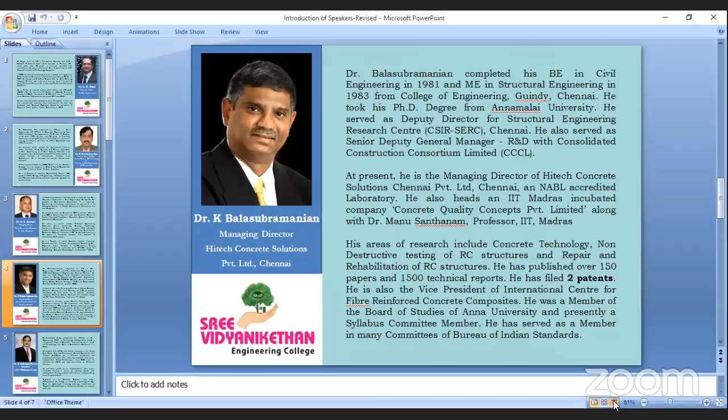Good morning to Balasubramanian, sir. It's my privilege to introduce Dr. Balasubramanian, a renowned civil engineer.

He completed his BE in Civil Engineering in 1981 and ME in Structural Engineering in 1983 from College of Engineering, Guindy, Chennai. He took his PhD degree from Annamalai University. He served as Deputy Director for Structural Engineering Research Center, CSIR SERC, Chennai.

He also served as Senior Deputy General Manager R&D with Consolidated Construction Consortium Limited, famously known as CCCL. At present, he is the Managing Director of Hitech Concrete Solutions Chennai Private Limited, an NABL accredited laboratory.

He also heads an IIT Madras incubated company, Concrete Quality Concepts Private Limited, along with Dr. Manu Santhanam, Professor of IIT Madras. His areas of research include concrete technology, non-destructive testing of RC structures, and repair and rehabilitation of RC structures.

He is a renowned structural engineer who renders service to the civil engineering fraternity in the form of training and mentoring.

Good morning. I would like to thank Professor Ishwar Reddy and Dr. Yuvraj for giving me this opportunity to speak to you. Today, I'm going to speak on the very practical aspects of concrete NDT practices and case studies. My approach would be basically to tell the faculty to approach any problem from a consultant's perspective. You're all very strong in teaching, and for the past 10 years I've been more in the industry.

So my talk will be more oriented towards solving industry issues from a practical consultant's perspective. This is what I wanted to tell as an introduction, and I would straight away go into the topic. I've been doing NDT for the past almost 35 years, so I would like to tell all the positives and the limitations also in the various NDT methods.

So what are the various non-destructive tests that are commonly adopted? I might have missed one or two, but these are the common non-destructive tests used in the construction industry: rebound hammer test, ultrasonic pulse velocity test, core drilling test to evaluate equivalent cube compressive strength of concrete, carbonation test, half-cell potential test, and even resistivity test. Also the evaluation of chlorides and pH through concrete powder samples, and profoscope survey for identifying cover and rebars.

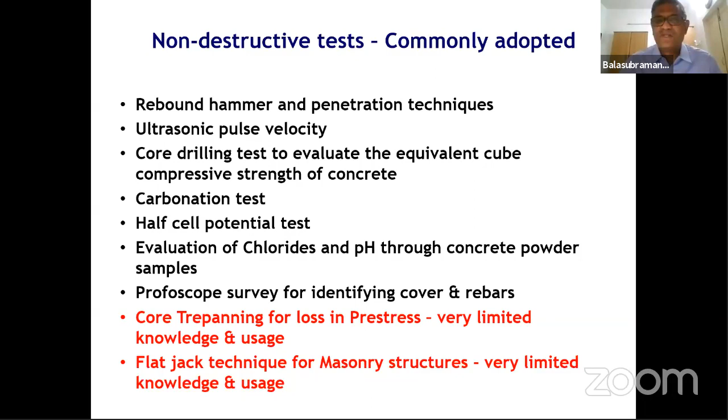So these are the various non-destructive methods. The non-destructive methods that are not very popular are the thermal method, radiography method, and stress wave propagation method.

These methods are not popular because of the lack of physics knowledge on the part of structural engineers, and our reluctance to work as a team with consultants with a strong physics base. For example, you have impact echo and many other things. There are people carrying it to construction sites, but the interpretation is a little difficult. Unless you have a very strong physics knowledge, or at least someone on the team who does, it's very difficult to interpret these methods. That's why they haven't become very popular.

But I feel shortly people will be working more and more on these methods in the laboratory, and then taking them to the field. Once some correlation can be obtained, these methods will become more popular.

Right now, as of now, we are using some very rudimentary methods like the rebound hammer, UPV test, and so on. So first I'll tell you what the rebound hammer test is. My structure for the talk is: first I'll quickly go through all the various test methods and their limitations, then I'll go into situations where these tests are being used, and finally I'll wind it up with a case study.

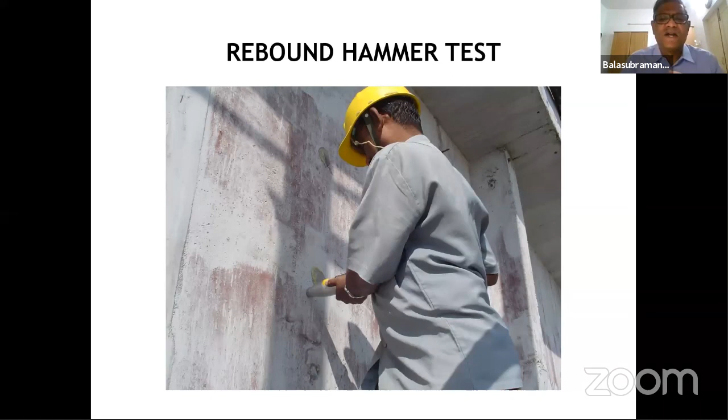So, the rebound hammer test—most of you are aware of it. It's basically handheld equipment that measures the surface hardness of the concrete. The rebound is measured on a graduated scale, giving a rebound number; the larger the number, the harder the surface. It's basically a qualitative test.

Unfortunately, what is happening in our country is that this rebound hammer test is being grossly misused. The reason is that rebound hammer numbers cannot predict compressive strength very accurately. They use calibration graphs supplied by the manufacturer, or some laboratories make cubes, hit them with the hammer, and try to make a correlation graph. But from my experience, it is very, very dangerous to use a rebound hammer to predict the compressive strength of concrete, because it is always giving 1.5 to 2 times more than the actual strength.

So it's basically a qualitative test, because it measures near-surface characteristics of the concrete, meaning it measures the quality of the cover concrete. The cover concrete is very important because it is through the cover concrete that chlorides or carbon dioxide diffuse into the concrete and depassivate the steel. So naturally the cover concrete is important, and this rebound number may give you some idea about its quality. But to predict the strength of the concrete based on the rebound number is a little risky.

It also depends on the smoothness of the surface, varies with the size, shape, and rigidity of the specimen, and is affected by the degree of saturation. Generally, carbonated concrete gives a very high number. So these are some of the limitations of the rebound test.

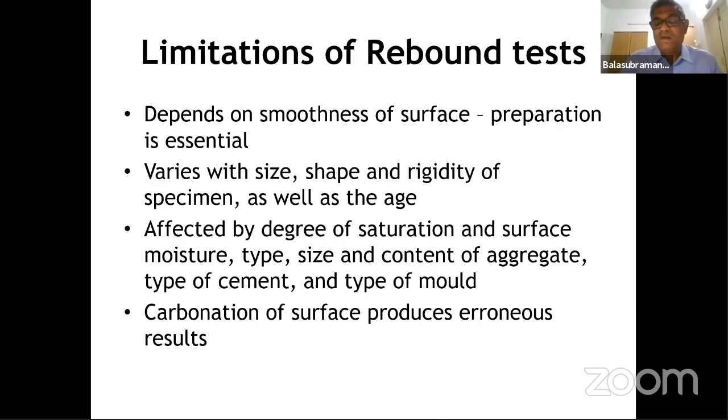As faculty, you can definitely teach this method, but you must always put a rider that predicting the compressive strength of concrete through the rebound hammer may lead to erroneous results, in correlating with strength.

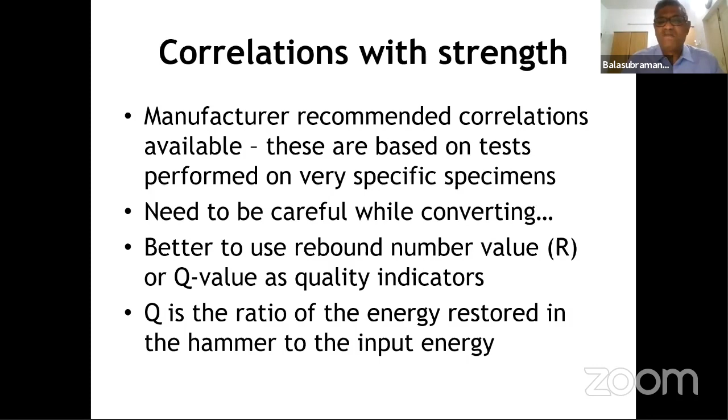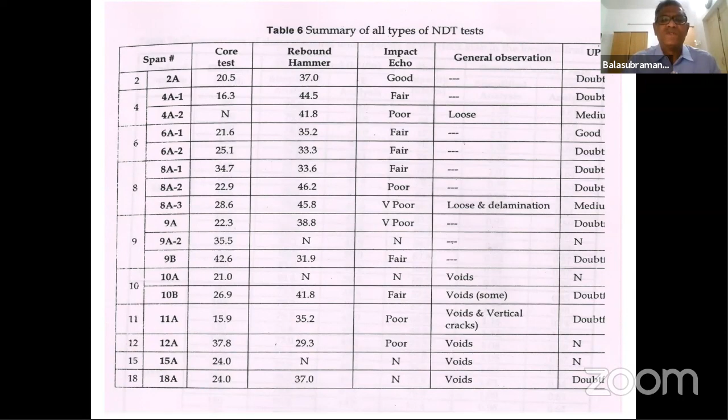So what is happening in our industry is, for example, they make the columns. Within 21 days, the next slab is made. After 28 days, the cube compressive strength results come. Sometimes the results are lower. Then the contractor is a little afraid to take the core, because he knows when the cubes have failed, most of the time the core also will fail. But the slab has already come up. So the NCs are created, by the PMCs and by the client engineers, and the NC has to be closed.

If he takes a core and the core results come low, it may lead to some strengthening, like micro concrete jacketing or FRP wrapping, based on the designer's decision. So that time he lands into trouble, because the floor space is reduced if you go for micro concrete jacketing. So he brings in an agency with the rebound hammer, and they hit it and finally say that the strengths are fine. So the NCs are closed. This is what happens where I come from, in Chennai, where this rebound hammer test is basically being used for those things.

Another issue with the rebound hammer is when we have plastic shrinkage cracks on the deck slab. The PMCs or client engineers are unhappy with the contractor, and the contractor does not want to own the responsibility because he has not floated the concrete and closed the plastic shrinkage cracks. So he puts the blame on the RMC guy. The RMC guy does not know what to do, since he has to get business from the contractor. So he knows the contractor has made a mistake, but...

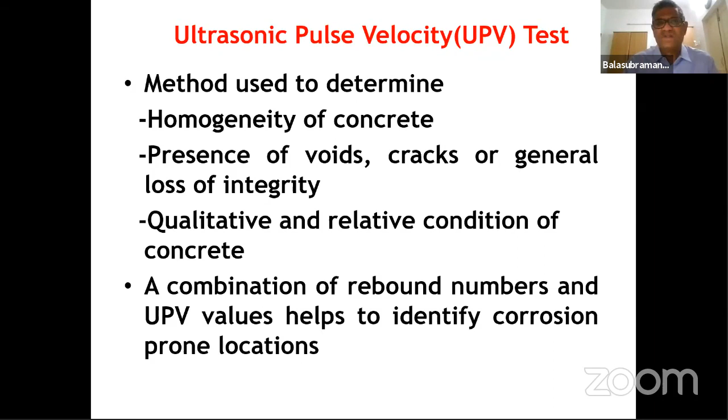So what are the various methods of doing a UPV test? Direct transmission test is always better, it gives a better confidence level. Suppose two sides are not accessible, then you can do a semi-direct transmission method where the path length is the hypotenuse of the triangle formed between the two points. And sometimes indirect or surface transmission method is adopted too.

For example, you have a retaining wall where backfilling has already been carried out, and the client is not happy with the quality of the concrete in the retaining wall. Obviously we cannot dig up the entire backfill, so that's when indirect transmission method is adopted. But it's a very approximate method, so you should try to avoid it as much as possible.

And sometimes these UPV tests are even used to measure the depth of a crack, and for that you go for an indirect measurement. When measuring crack depth through an ultrasonic pulse velocity test, sometimes it gives an erroneous result, so you need to be very careful.

Because sometimes I find the width of the beam is about 30 centimeters, and when you apply the equation given in Bungey or in the IS code, you sometimes get a very erroneous result. So you have to be very careful while predicting the crack depth also.

This is common knowledge: if sound concrete is there, the waves will travel very fast. If there is reinforcing steel, it travels much faster. But we don't apply a correction factor for the reinforcing steel, because as we'll see in the next 2 or 3 slides, the method to predict the numbers given for the integrity of concrete is so wide that the reinforcing steel may not have such a great impact.

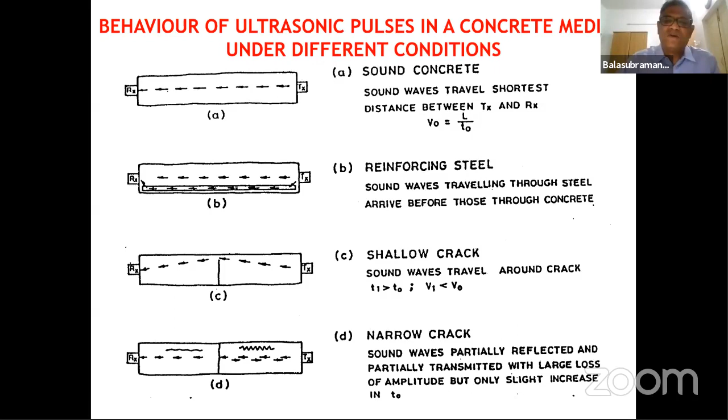When there are cracks, the sound waves have to travel around them, so the time taken is more. A narrow crack will sometimes be partially reflected, while a wide crack will definitely be reflected, giving you unstable readings or no signal at all. With voids and micro cracks, sometimes you may get a very low value or an unstable reading.

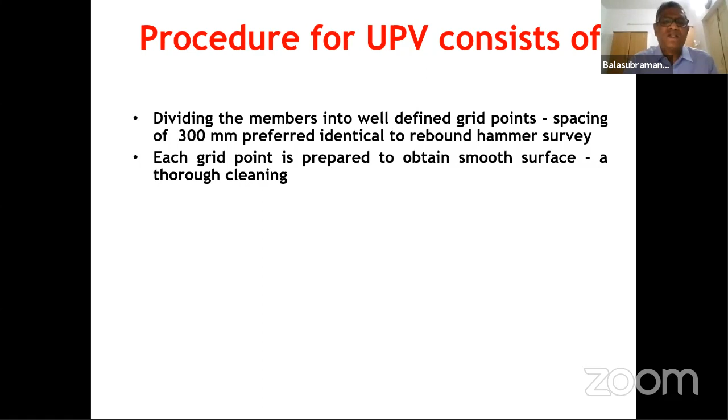The general procedure is to divide the member into well-defined grid points. There is always a debate on what the spacing should be - 300 mm is what the code gives, but as a consultant you can take a call, because if you put 300 mm for a large structure, the number of points increases and the cost of the whole testing goes up. So each grid point spacing, 300 mm or 500 mm, is something the consultant can decide, though the guideline prefers 300 mm.

Each grid point has to be prepared and smoothed. We need to apply acoustic coupling, like grease, between the transmitter and receiver so the pulse is properly transmitted. Recording the transit time is done in an instrument - generally people use PUNDIT. Then the velocity is calculated as L/T, that is, distance between the two transducers divided by the time taken.

So if the velocity is more, the quality is more. That is, if the time is less, the velocity is higher, so the integrity is much better.

Now, the IS code - recently, in the past year, it has been upgraded. The old IS 13311 said any velocity above 4.5 kilometers per second is excellent.

Between 3.5 and 4.5, they said it is good, and 3 to 3.5 medium, and below 3 doubtful. This was very useful to consultants like us because we had a clear idea that generally when velocities are low, meaning the integrity is not that good, the general methodology given is grouting with either a low viscous epoxy resin or cement. When velocities are above 3.5, there is no problem. When velocities are between 3 and 3.5, we found that the grout does not go inside. Only when velocities are less than 3 kilometers per second does the grout generally go in. So it was quite okay.

Now the recent IS 516 part 5 has come out with this kind of specification. They say that for any grade of concrete less than M25, any velocity below 3.5 is doubtful, 3.5 to 4.5 is good, above 4.5 is excellent. And for all grades of concrete above M25, it says below 3.75 is doubtful.

So this is something which I spoke to my colleague, Dr. Manu Santhanam, who's a very eminent concrete technologist, also in the Bureau of Indian Standards. We told them that most of the structures we go and investigate are more than 30, 40, 50 years old. The basic idea of this table is the code committee, subcommittee felt that the quality of concrete has to improve because we have gone many notches in the way we do concreting. So naturally the service life of the structure has to be good, and for that the quality of the concrete has to be good. So they have put higher threshold numbers of 3.75 and above.

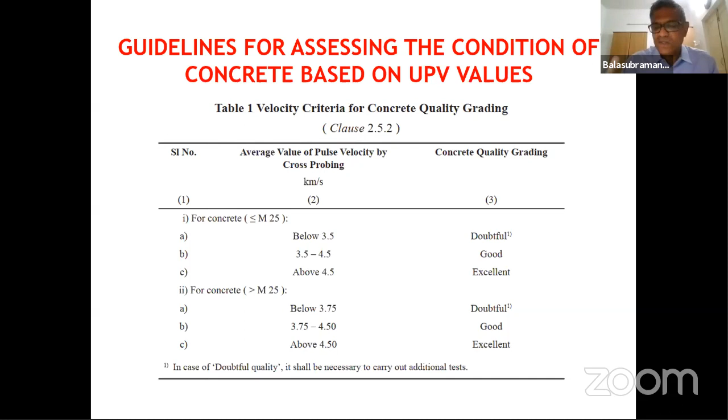Anyway, this is something which I don't know which code has to take a call on. They have to go a little more into this and come out with something, because I'm very sure, any velocity now as per this code below 3.75 is doubtful. For example, if the velocity is 3.5, I'm going to say the quality of the concrete is doubtful. Now the client is going to ask me, sir, you have given the quality as doubtful, then what is the methodology? Then I'm going to say grout. So now they are going to call for grouting. I'm very sure if the velocity is 3.5, no grout is going to go inside. So for the past 6 months we are all struggling how to circumvent this problem. As a consultant, you have to give grouting because as per code it is doubtful, you have to give it. But practically we know nothing is going to go inside. So this is something we are not able to understand.

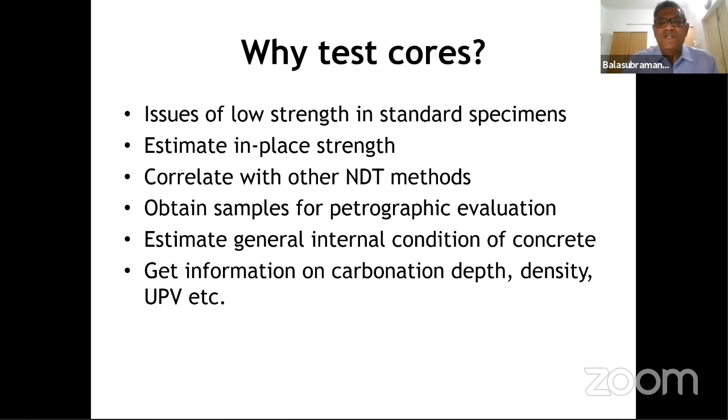Now next is the core test. Why do we test cores? It is basically because of low strength in standard specimens, that is, in the cubes. Sometimes designers may like to do a design check, and the building may be 40 years old where no drawings are available. At that time we do the core test to give the designer the FCK value, or sometimes correlate with other NDT methods. Sometimes people ask for petrographic evaluation to generally estimate the internal condition of the concrete or get information on the carbonation depth, which I'll cover in the next few slides.

And how many cores to be tested? Again, no code of practice is very clear about it, whether it is ASTM, ACI, BS standards, or Euro standards. Nobody says how many cores we need to take when the quality of concrete is suspect. So this is something you need to take a call on as a consultant.

If there is a cube failure, then take at least 3 cores from that particular batch. And if it is meant for in-place strength, as I told you, the designer wants to check a multi-storied building, which is 10 stories, which does not have any GA drawing, no structural drawing, no FCK value. Then that time we try to take as many cores as possible from each floor, about 5-6 cores, 2 from the column, 2 from the beam or something, and then try to give the designer some kind of confidence level for him to feed it into his STAAD Pro model or any model.

So how many cores is a question mark. I don't think people have to break their head so much into this. As a consultant, you take a call and take a conservative call, that's all. You can decide on the number of cores. And this is how a core test is done. Most of you would have seen that.

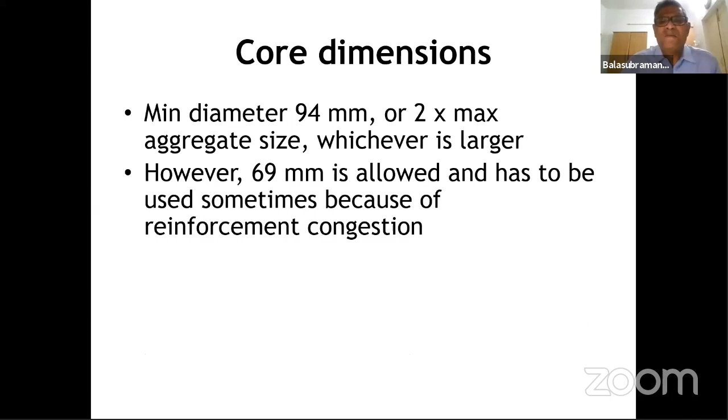So what is the core dimension? Generally it says minimum diameter 100 mm or 94 mm. But today the congestion of the reinforcement is so much that we are not able to take a core. Suppose the core is 100 mm diameter, then the inner diameter is approximately 94 mm. Sometimes the congestion of the reinforcement is so heavy.

Most of the time what we are doing, every year we are taking a few hundred cores, and then generally we are going for a 69 mm diameter core, because cutting of the reinforcement has to be avoided to the extent possible.

And generally L/D equal to 2 is preferred. Now the new code has given you correction factors for L/D which are not exactly 2. And any L/D equal to less than 1, we should not test the core, because it will not give a proper result. Testing of the cores is as per IS 516. L/D should be 2, try to make it as much as possible to 2.

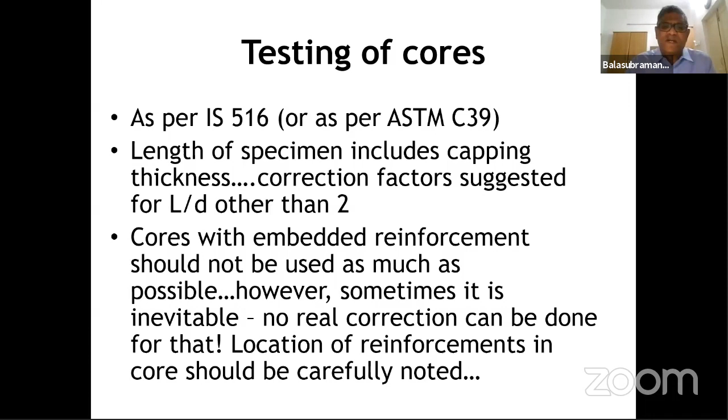And cores with embedded reinforcement should be avoided as much as possible. One is cutting of the core, cutting of the reinforcement during a core test - designers will not be happy about it. Second, a core with embedded reinforcement may give you a very erroneous result. If the bond is not good and all that, then it may not give a proper result. So as much as possible, try to avoid cutting of the reinforcement from all perspectives, from the designer's perspective, as well as from the core concrete strength perspective.

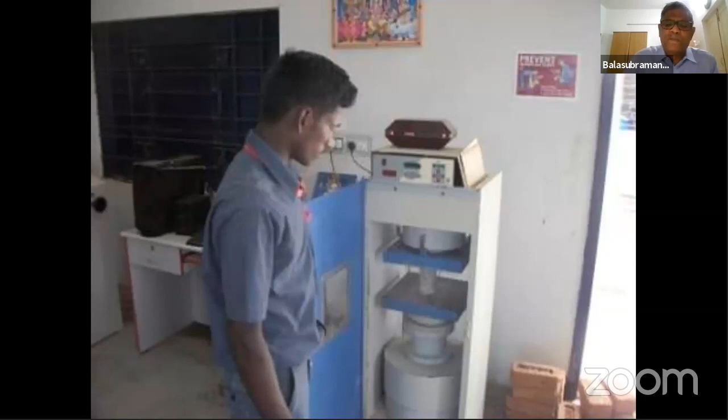Actually, sulfur capping - now we are done away with sulfur capping because it is not good for health. And now we are doing it with a high strength compound. And now cores are tested, and then finally it's done.

Then what is the acceptance criteria? Now the IS code says, suppose you are testing 6 cores or whatever number of cores, the average should not be less than 85% of the FCK, not the target strength, FCK. And no individual core shall be less than 75% of the FCK. For example, if you take an M30 grade concrete and you have taken 3 cores or 6 cores, average should be 0.85 times 30, which is approximately 25.5. And no individual core shall be less than 0.75 into 30, which is 22.5.

This is what the IS code says. Suppose it doesn't satisfy M30 grade, then you need to check whether it is satisfying M25 grade and then pass on the information to the designer. So the designer takes the final call.

And then from the cylinder to cube, we apply a correction factor of 1.25. So basically, for diameter lesser than 100 mm, if the diameter is 75 plus or minus 5 mm, then we apply a correction factor of 1.03. And if the diameter is less than 70 mm, we apply a correction factor of 1.06.

So what are the various correction factors? One is for the L/D ratio. Generally try to take a core with an L/D ratio of 2. If it is not possible due to practical scenario, then there is a correction factor that is given. Generally try to take a better 100 mm diameter core, but then due to congestion of the reinforcement, we need to cut the reinforcement, so we go for a lesser diameter core.

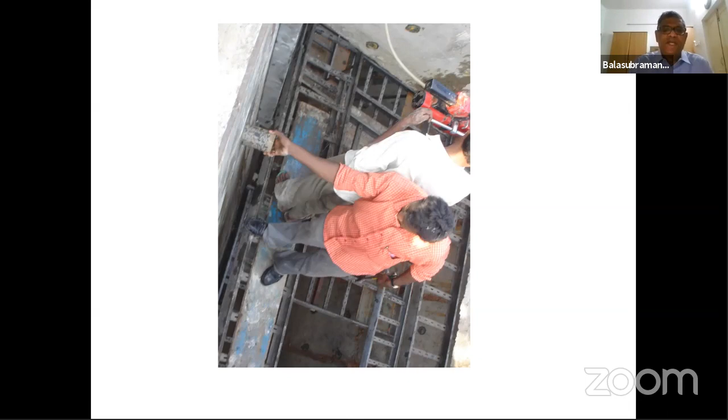Generally, this is a durability test — the carbonation test. I think yesterday they would have spoken a lot about durability. Carbon dioxide diffuses into the concrete through the cover concrete and reacts with the calcium hydroxide, reducing the pH value and depassivating the steel. That's carbonation, and one way of checking it is getting the pH of the concrete through a concrete powder sample.

The second method is you take a core and spray a phenolphthalein solution on it. The whole thing should turn pink, but there are locations where it will remain colorless. So this is a plaster and this is concrete — the carbon dioxide has diffused so much into the concrete.

Basically, the reason we do this test is that during repair and rehabilitation, we always want to chip off the bad concrete. So if the carbonation depth is significant, say 25 or 30 mm, we chip off that carbonated concrete and give a fresh layer — putting in a micro concrete or a polymer modified mortar, depending on the thickness. So this is the carbonation test.

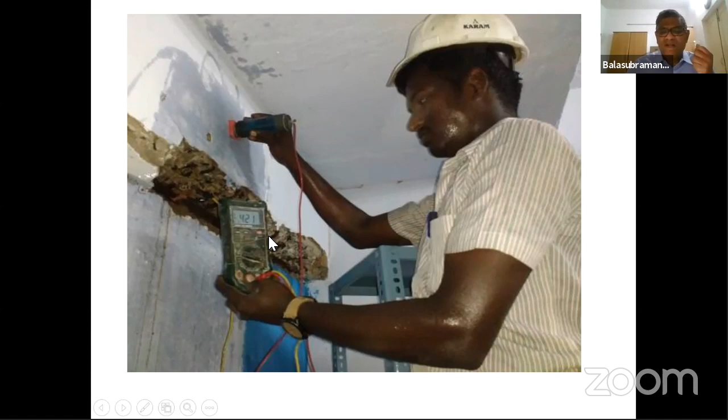Then there's the half cell potential test, which is an ASTM test — most of you would be aware of it. We use a copper sulfate electrode with a multimeter; one lead is connected to the rod, which is chipped open and connected here, and we measure the half cell potential difference. If it is more negative than minus 350 millivolts, there's a 90% probability of corrosion. If it is between minus 200 and minus 350, corrosion activity in the area is uncertain. If it is more positive than minus 200 millivolts, there's a 90% probability that no steel corrosion is happening.

For me, this test isn't very useful in most structures we go to, because it's terribly corroded already. There's no point doing a half cell potential test on corroded areas, because obviously it has already corroded — the concrete has cracked, spalled, and there's a loss in diameter.

So generally we use this test when we go to a very huge structure, whether it's a marine structure or a bridge, where we're asked to give the rehabilitation methodology as well as a bill of quantity. When calculating the bill of quantity, we need to be very sure with the limited testing we do — so we do the half cell potential test on the good-looking locations, to check whether the visually good locations are really good through this test. That's the only case where we want to use it, because in any corroded area there's no point, since we'll obviously get a value more negative than minus 350, maybe minus 500 or minus 600. So generally we use this half cell potential test in a large structure only in the good areas, so that we know the visually good locations are really good from a corrosion potential point of view. That helps us decide on the bill of quantity required for the rehabilitation. This is the half cell potential test.

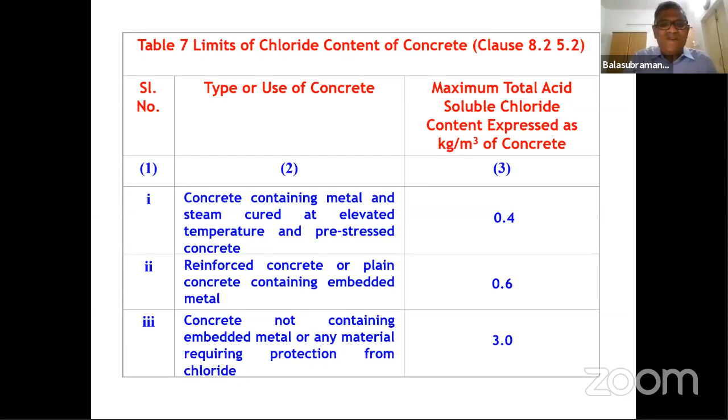That is more precise. Here, when I do it with a drilling machine, I cannot get a proper profile, because even if I put a dryer and try to blow it, it may not give a perfect result, but it gives some idea about the chloride content. The best way would be to drill a core, put it in a lathe with a chuck, and use a tool. Then you can precisely find the chloride content from 0 to 10 mm, 10 to 20 mm, and so on, so you know to what depth the chloride has penetrated, for suggesting a proper rehabilitation methodology. But that is very sophisticated, so we go for these simpler methods.

This is again common sense: high pH value and low chloride content means not corrosion prone. High pH value but high chloride content will naturally corrode because of chloride. Low pH value will corrode because of carbon dioxide, and low pH value with high chloride content is definitely corrosion prone. The last one is the profometer.

This is basically a profometer or profoscope. It gives you the location of the rebars and also measures their diameter. But there are a lot of limitations. A profometer will not detect a rebar if the cover is more than 70 mm. So that's a limitation.

Suppose I go and put it in a column. Generally, what happens is while kinking, or going from one floor to another, if the levels are not okay, they try to kink the rebar and take it up. So one side will have 15 mm cover, the other side will have about 80 mm cover. At that point, when the cover is 80 mm, this will not detect the rebar.

It can predict the diameter of the rebar, but there can be an error of plus or minus 25% in that prediction. Hilti also has much better equipment. This profoscope is about 5 lakhs, while that one is about 15 to 20 lakhs. There, they say it can be off by one diameter more or one diameter less. So prediction of the diameter of the rebar is a little dicey.

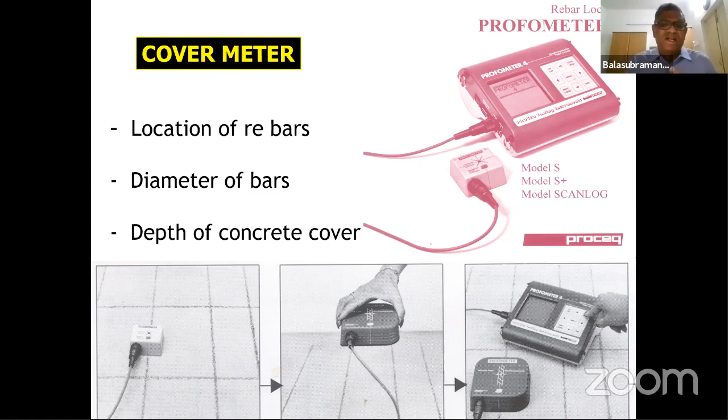So the final one is the load test, because when everything else fails, the IS code says do a load test.

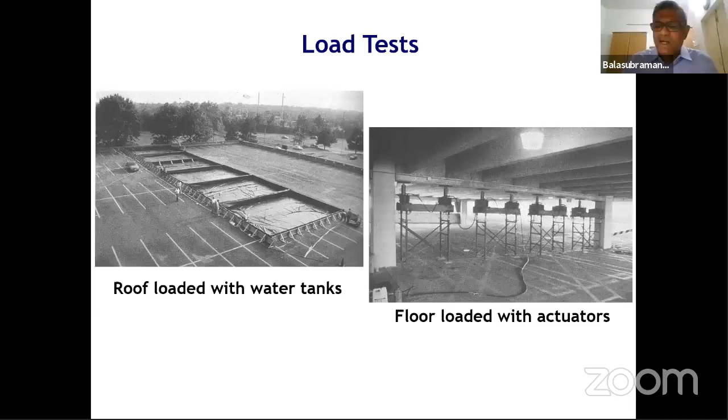You can do ponding, or you can go with a sandbag, or anything. If you're very sophisticated, you can go with jacks also. So these are the various things. I would like to just cap it up.

So what are the various methods? One is non-destructive. What are the various non-destructive methods?

Rebound hammer is a good tool, but in my perspective it should not be used to predict the compressive strength. It basically gives the near surface characteristics of the concrete, and the quality of the cover concrete, because it is through the cover concrete that chloride or carbon dioxide diffuses in. If the quality of the cover concrete is good, then naturally your durability will be good.

Ultrasonic pulse velocity test is basically used to measure the integrity of the concrete. It tells you whether your concrete has got voids, honeycombs, or pores. If the velocities are less, then we can suggest a low viscous epoxy resin, or cement, or polyurea, polyurethane, depending on the scenario of the repair.

Now the new code that has come out is a little difficult, because any velocity less than 3.75 kilometers per second they say is doubtful. From a practical point of view, I have a sister concern that does a lot of repair work, and they are very clear that at any velocity of 3.5 kilometers per second, grout will not go inside. So the code has to take one more call on this.

Otherwise, the owner will be spending a huge amount of money. As a consultant, if the velocity is 3.5, as per the old code it is good, but as per the new code it is doubtful. So as a consultant, I have to give a methodology, otherwise I won't look good. So I give a methodology, and then the grout will not go inside. Somebody is going to make more money, and the owner is going to pay for it.

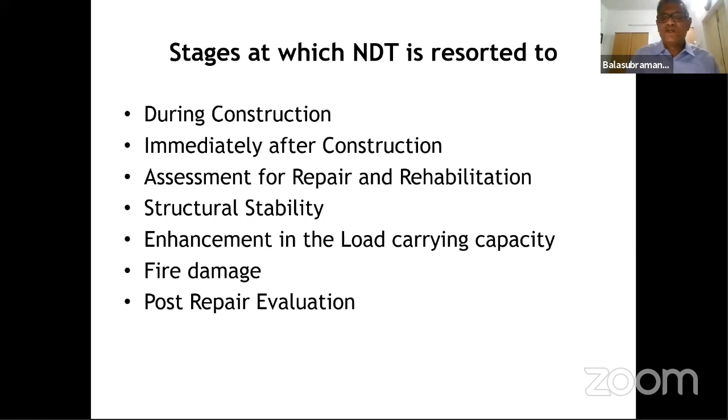And then the post-repair evaluation - these are the stages at which NDT is resorted to. So I'll go practically through what are the stages. Each stage I will try to define to you.

During construction, when NCs are created - NCs are called non-conformities. Maybe the faculty, you may not be very familiar with the way the industry works. Non-conformities are created and cube failures happen.

The problem in the industry is the bills will get passed. Like, if it is a 1 crore bill or 2 crore bill, the bill will get passed only when the cube passes. So when there is a cube failure, there is a lot of halla golla happening at the site, because then the bills will not get passed.

So that's the reason why you have to take cores. And the contractors are a little hesitant to take cores because they know the cubes are being done with so much care, and even though they fail, when you take a core it may also fail. Even though there is so much buffer of 85% of the FCK, still they are not very comfortable.

So they bring a rebound hammer. With the rebound hammer, they are very comfortable because the rebound hammer predicts the strength on the higher side. So the NC is closed and then the bill gets passed.

Sometimes there is honeycombing or poor quality surface, shutter issues. That time there is no point in putting a probe or doing an ultrasonic pulse velocity test on honeycomb - it will naturally give you bad results. So they may do a repair first, and then post-repair, they will ask you to do a UPV test. The values come good, which means that the repair that has been carried out is quite effective.

So these are the cases during construction - when NCs are created, when cube fails, honeycombing, and the consequent repair and post-repair evaluation. These are the stages during construction.

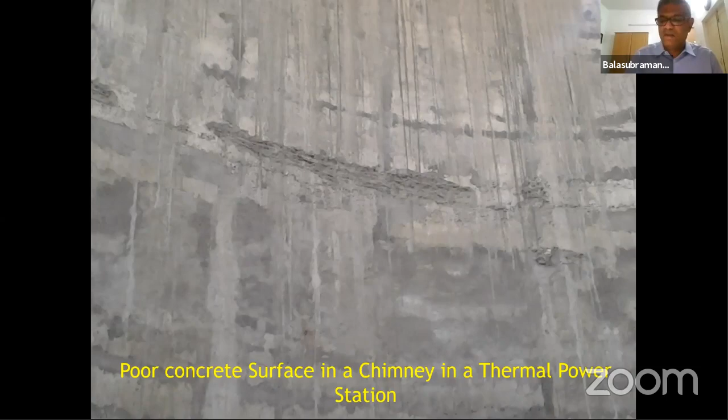This is another chimney which again has a poor surface. Cutting a core in a chimney is always a headache because you need to have some julas, go on top, and then cut the chimney. So then you take a core and tell the client, sir, your problem is only in the cover concrete location. You can go out with the rehabilitation methodology and move on - your core of the shell is fine. So this is how we need to approach the problem.

You can do UPV and make more money, but with this kind of concrete you will get unstable readings. So you have to be a little more ethical in your approach, because making money is one thing, being ethical is another. In this kind of situation, just take a core, tell the client, and close the issue so things move faster.

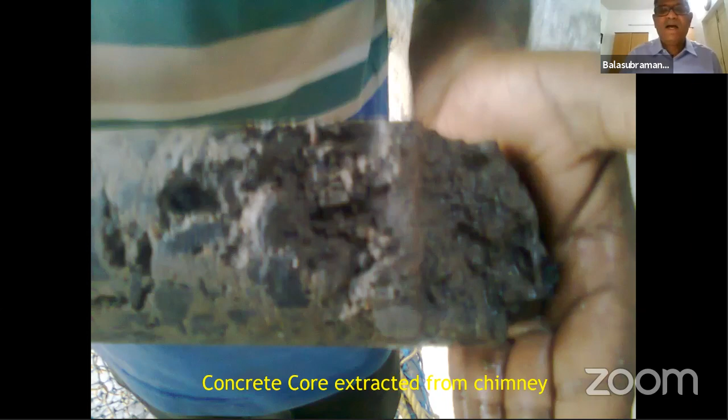Immediately after construction - this is very rarely used because nobody wants to check the quality of the concrete immediately after construction, since everything is settled with the cube results. Now, this is to settle future disputes between civil and other disciplines of engineering, as in the case of power plant structures, TG columns and TG decks.

And the owner, when he puts 3,000 crores and then puts a TG on top of that, after some time suppose it trips - the civil engineers construct and then move on, then it is taken over by the electrical and mechanical engineers, and there will be very few civil engineers to do maintenance. So the mechanical or electrical engineers invariably find fault with the civil engineer, saying you have made this column and TG deck slab so bad that my machine is tripping. And one day's trip is 5 crores loss for me, and on the financial and societal side, 100 villages may not get power.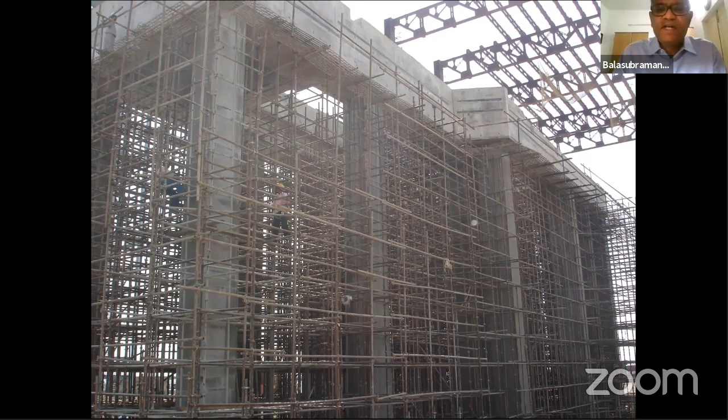So to settle this dispute, BHEL in the 90s said, once a TG column and TG deck is made, a UPV test will be conducted. If the UPV test is fine, then the TG will be erected, and any issue later on due to vibration or tripping, the onus of responsibility will fall on the mechanical engineer. Because there could be a misalignment of the machines, and a mechanical engineer will not like to take up that responsibility, so they simply pass the buck to the civil engineer when the columns are good. So once you do a TG deck and TG column ultrasonic pulse velocity test and establish that the quality of the concrete is perfect, then the onus of responsibility for future problems will go to the mechanical engineer.

This issue was taking place a lot in the 90s, and that has been now settled once and for all. Any TG deck, because these are all quite expensive - 3,000 or 4,000 crores of money is dumped in a 600 megawatt power plant - and they don't want to take any risk. So UPV is done in 300 mm or 500 mm grid spacing in the TG columns and also in the TG decks. Once it's cleared, in my 35 years experience I've done about 70 or 80 TGs, except this one which is again in Orissa. All the other TGs I never had problems.

This is a TG deck. Poor concrete, maybe a design mix issue, then shutter issue, a lot of issues, and they created this kind of TG deck. The owner was completely upset because this is a vibrating structure, not a static structure. If it's a vibrating structure, it may trip anytime if your quality is bad. So there's a lot of tension. This kind of TG deck they produced.

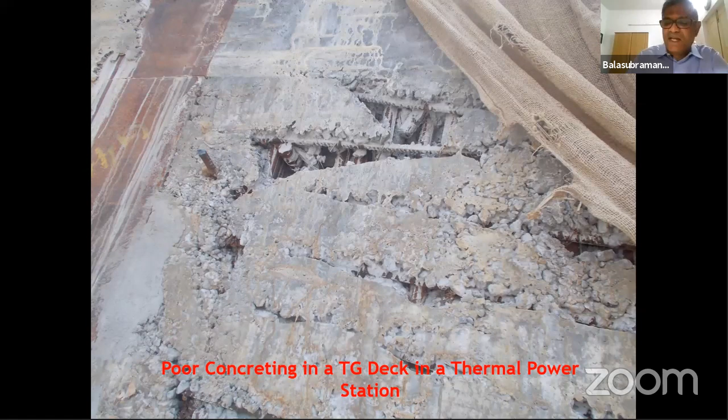So immediately after construction, this is done to settle future disputes. Mostly this NDT is done for a third assessment, for repair and rehabilitation, including accidents and failures - to assess the condition of the concrete for durability issues, such as determining a suitable repair and rehabilitation method. Most of the NDT we do today is generally for repair and rehabilitation, because people don't want to spend a lot of money - each rehabilitation costs 30 lakhs, 40 lakhs, or sometimes a few crores. So they don't want to take a call like that. Designers also don't want to take a call on a structure which is already 40 years old. So they want to do some minimal testing to assess the condition of the concrete before any repair and rehabilitation is taken up. This is also done in cases of accidents, poor maintenance, fire, so many things.

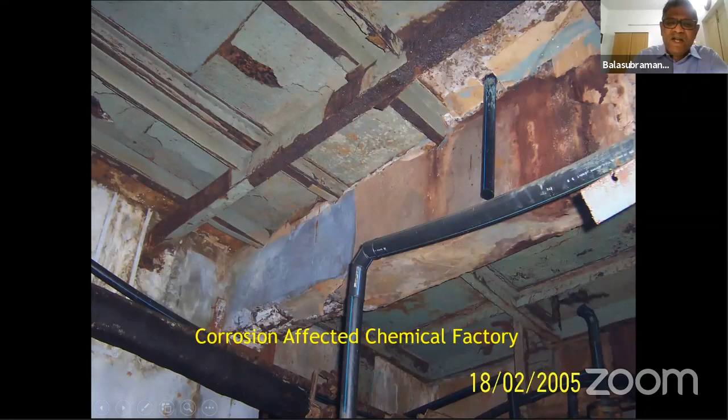For example, this is a corrosion-affected chemical factory - I'm just telling you the conditions. This may be an institutional building, a factory building, or a hydel power station which has not been functioning since construction - again NDT is utilized. Or it could be a bridge where you find the entire girder has complete spalling of concrete, corrosion, and exposure of reinforcement - this is an NHAI bridge. Or it could be a bridge where a few spans have fallen down due to an accident, and at that time people have to understand the remaining condition of the other spans. These are all pre-stressed bridges, so that's when NDT is resorted to.

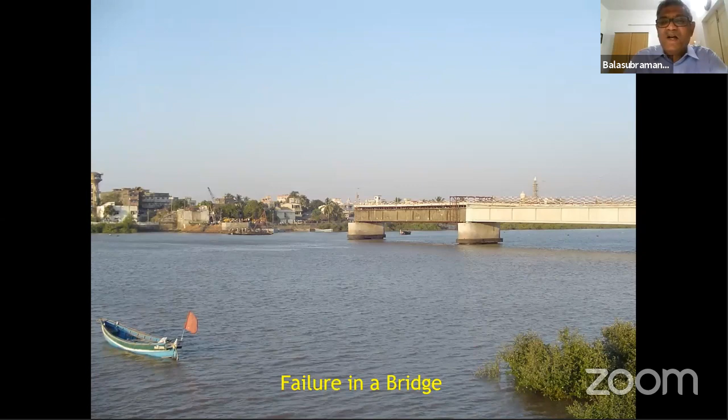Doing an NDT in a structure like this is so difficult because scaffolding becomes an issue - you need to fabricate a movable scaffolding that moves along with the span. Then marine structures - this is a barge which hit a mooring dolphin and knocked off a pile. The owner will be worried: one pile has gone, what about the condition of the remaining piles, the deck, the mooring dolphin, whether it's okay. That's when NDT is resorted to.

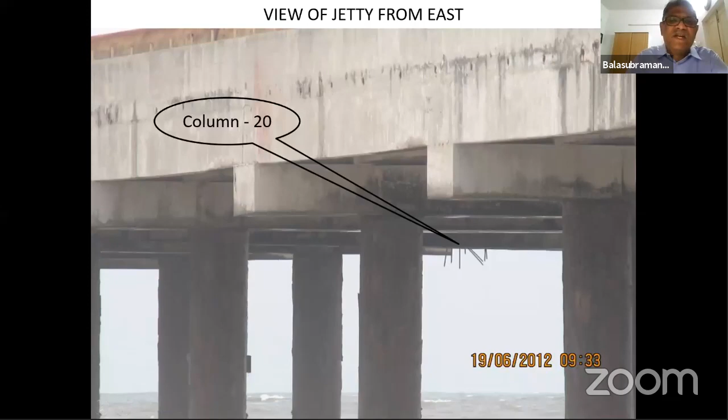Or again, this is another jetty in Visakhapatnam where a pile has been knocked off by a barge again - just one pile knocked off, so NDT is resorted to. Or it could be a dock jetty constructed 40 years back with so much corrosion - this is in West Bengal. This is another approach trestle in Tamil Nadu where there's a lot of corrosion. And again, this is an oil jetty, again in Tamil Nadu - you can see the corrosion here, a lot of corrosion. I'll just put it as a case study.

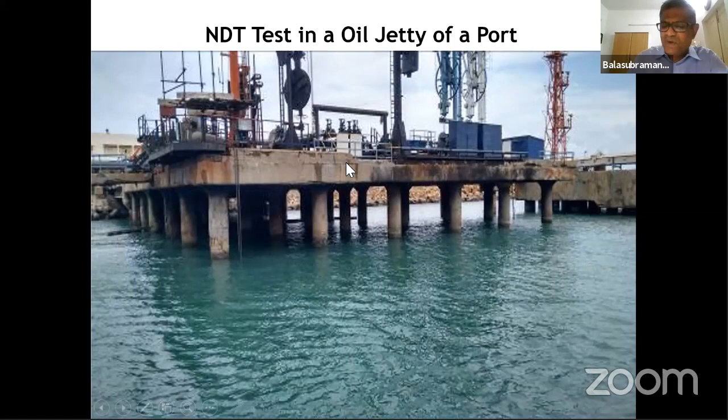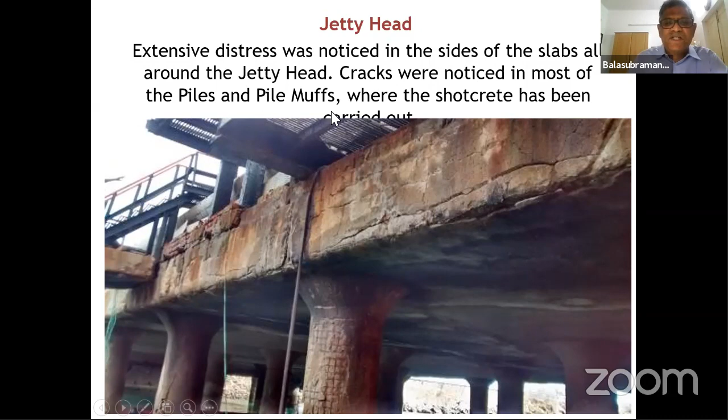What's happening is, in earlier days, people resorted to shotcreting without any shear connector. So within about 5-10 years, whatever repair they carried out is coming off, meaning more money being spent again. So that's when NDT is resorted to, because they want to get the bill of quantity and the methodology, and they want to be very sure about the condition of the concrete. This is another jetty head where they put some weld mesh and shotcreted it - the shotcrete came off after 5 years. This is another coal jetty, again in Tamil Nadu, and you can see the kind of corrosion happening. And this is another jetty head again.

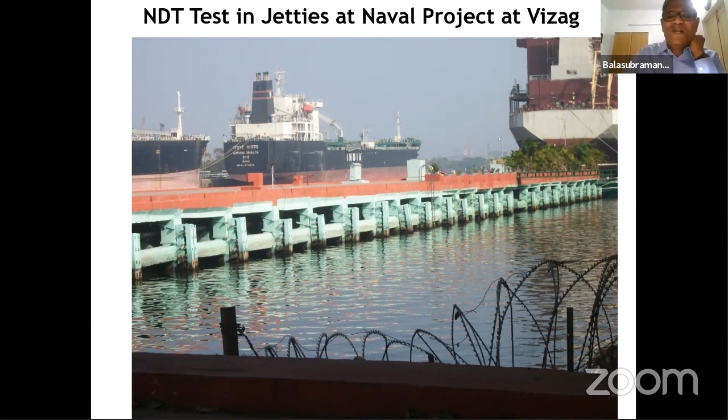Or this could be a naval jetty at Vizag, where again a lot of corrosion happens, because these are all marine structures, corrosion is inevitable. If the corrosion is detected at a much earlier stage, the repair cost will come down, but it doesn't happen. It happens only when it goes very bad, people start worrying and then bring in consultants.

The fourth thing for which NDT is resorted to is structural stability or enhancement of load carrying capacity. Old RC structures have no record of GA drawing, grade of concrete, or reinforcement details. You go to many 10-story, 12-story structures, there is no GA drawing, no reinforcement detailing, no foundation detail, no grade of concrete. That time we basically do the NDT to give input to the designer on these aspects. We do a profoscope to give an approximate idea about reinforcement detailing, take cores to give the grade of concrete, and from the durability point of view, do UPV tests or powder samples to give confidence to the designer so he can go ahead with his modeling.

Again, microzonation - for example, I'm from Chennai. Chennai was in zone 2, now it has become zone 3. That's fine, but what about public buildings? Because IS 13920 zone classification detailings are so different, some owners are getting worried due to microzonation about whether their building will be okay. Particularly government buildings, hospitals - these are very important because they drive the whole government. So the question is whether those buildings are okay. That time NDT is resorted to because they don't have any drawings, no GA drawing, no grade of concrete, no foundation detail.

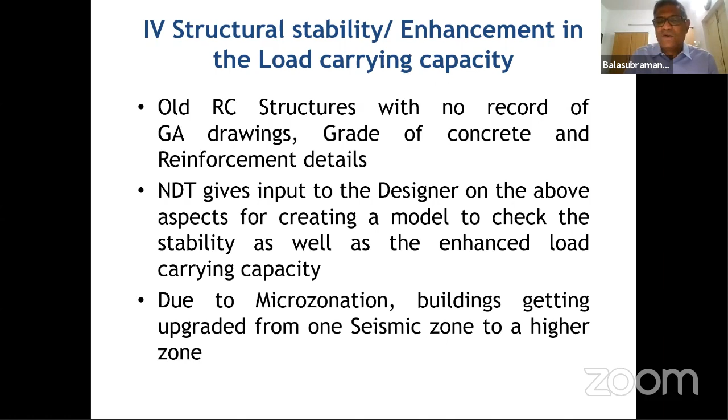For example, I'll give you one case study of a building in Chennai where the family got into trouble and a trust took over. The judge who became chairman of the trust wanted to get a stability certificate before moving on. To get the stability certificate, I approached IIT and we were helping them in this work. There was no drawing, nothing. So we had to do a rebound hammer from the durability point of view, UPV from the durability point of view, cores to give input to the designer for the FCK value, and a profoscope survey to give the designer the reinforcement detailing.

We didn't stop with the profoscope survey because it was a 10-story building, so we chipped it open at more than a dozen locations to cross-verify whether our profoscope readings were okay against the actual thing, otherwise corrections had to be carried out. Also, whether a second layer of reinforcement was present can't be determined with a profoscope survey. So we took a JCB, dug the foundation, and found out what kind of foundation had been given so the professor could feed it into his model.

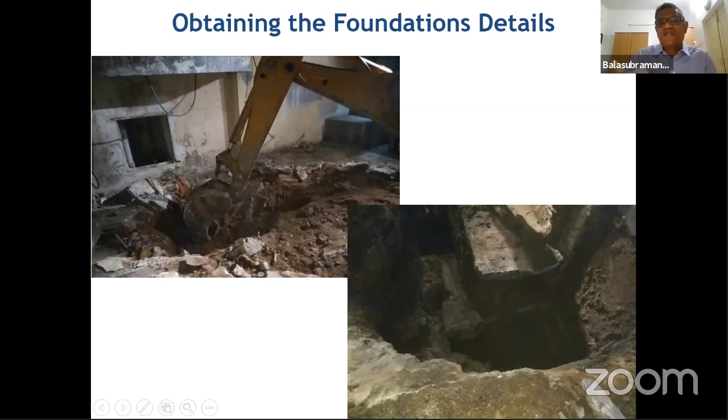So this is another case where NDT is resorted to - during construction for NCs and other quality issues, then immediately after construction, which doesn't happen in our country except in the case of TG decks and TG columns, because even with a 1,000 crore project, once it's done nobody goes for quality checks since they say QAQC records are already in place. And the third case is for repair, rehabilitation, and corrosion.

People don't want to spend too much money for testing, but at the same time they do want to spend a little because they're spending huge money on repair and rehabilitation. So that's one case. The third and fourth are for stability certificates - people go for NDT because no GA drawings are available, and the designer requires all this data, so he goes for these kinds of tests. These are the situations where NDT is resorted to.

As a consultant, deciding how many tests to do, how many cores to take, how many UPVs to perform, depends on the individual consultant's prerogative or confidence level. Because today when you test more, people object since it costs money, so they don't want that. From a consultant's perspective, people will say, why did you do so little testing, how did you manage to give a rehabilitation methodology for 2 crores with such limited testing? It's very difficult to defend. That's why we try not to do too much, but at the same time you can't do too little - you have to strike a middle path, and what that mid path is, is very difficult to predict.

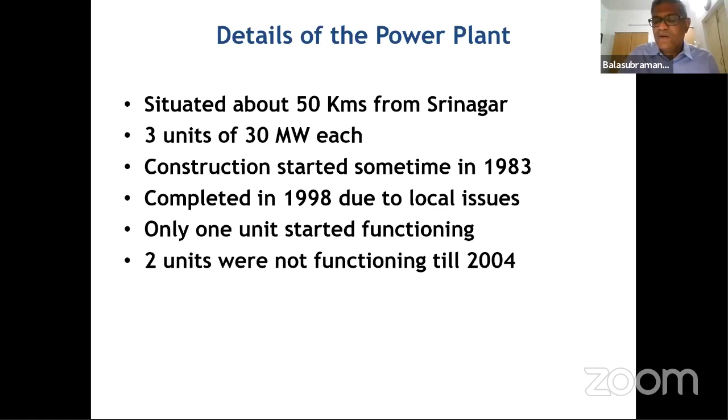30 megawatt is something big there, though here for us it's nothing. So 2 units were not functioning, and they brought in a lot of consultants who were not able to solve the issue. Finally they came to SERC.

When we did the initial inspection, I went from the integrity point of view, the concrete point of view. Fortunately, I took a vibration expert, because these hydropower stations are all vibrating structures. By doing simple UPV, rebound hammer, and durability tests, you are not going to find out why the equipment is tripping. So we took a vibration person. Ultimately, without the vibration studies, we could not have solved this problem.

They put pickups and ran the equipment at various RPMs—300, 500—because it runs at I think 3000 RPM or something, I'm not very sure. So they ran it at various RPMs and started measuring the vibration levels.

They put it across the various columns, because in a TG or hydro power station, there are many levels, many columns, many slabs, many beams. As a consultant, it's a nightmare to understand why the machine is tripping. So we needed to narrow it down—you can't test every column, beam, or element, it's very huge.

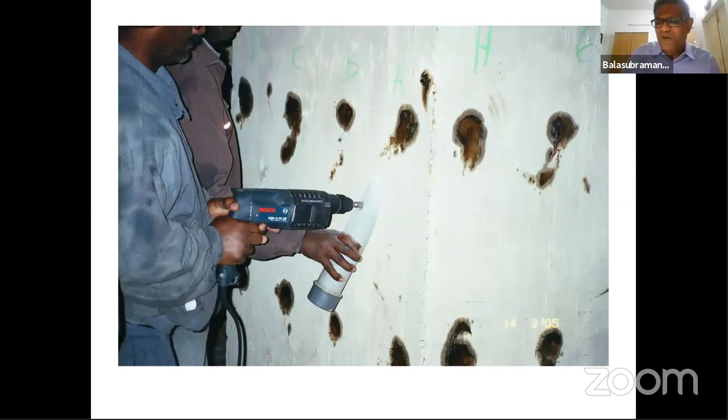So the vibration studies people started putting the pickups and running the equipment at various RPMs, trying to see whether the threshold numbers were going up from the vibration point of view. Simultaneously, we were doing UPV in the various columns. Durability wasn't an issue, but as a consultant, you still have to do all those things.

Finally, the vibration team said the small 1 meter by 1 meter pedestal, called the upper bracket or something, was getting a lot of vibrations. They told us to focus more on these brackets—there are about 8 or 12 small pedestals like this.

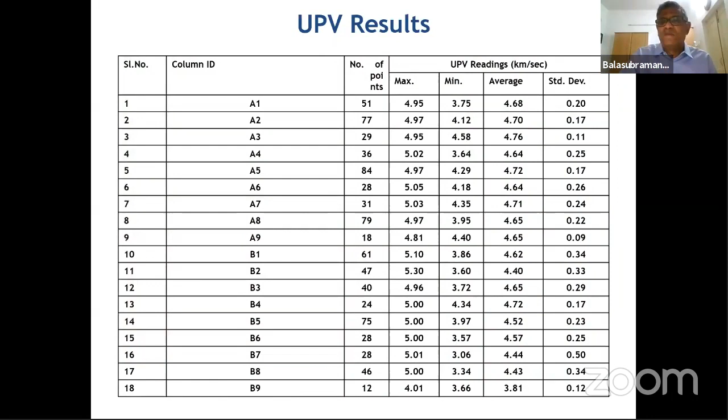When we did the UPV, the values came out very bad—we weren't getting any reading—whereas in the other columns, the velocities were so high there was no issue. So we felt the problem could only be in that small pedestal, called the stator support pads with the LGB floor.

They must have undergone a lot of damage, and then we decided that we had to do the repair. But the only right decision we took was that 2 units were not functioning right from the inception. So these are all small 1 meter by 1 meter blocks. Generally, when you get a higher vibration and lower UPV values, the general tendency is to go and grout it. Here we took a call.

It's such a small thing. We can remove the equipment, break the pedestal, and make it into a newer one. Put a fresh pedestal. And ultimately that decision worked out properly, because when they broke it open, they found that the tie rods of the equipment were not properly welded to the pedestal. That was the reason why it was creating the issue.

Looks very simple, but it was by sheer chance that we told them to break it open. The general tendency for any consultant, when he doesn't get a proper UPV value, is to go and grout it. But looking at the long-term issue of this particular plant, and since a lot of consultants have come and gone, people did not want to take a chance. We said break it open because it's not going to cost you any money. When they broke it open, they found that the welding was not okay. So they broke it open, repaired it, and the post-repair investigation was completed in 2006.

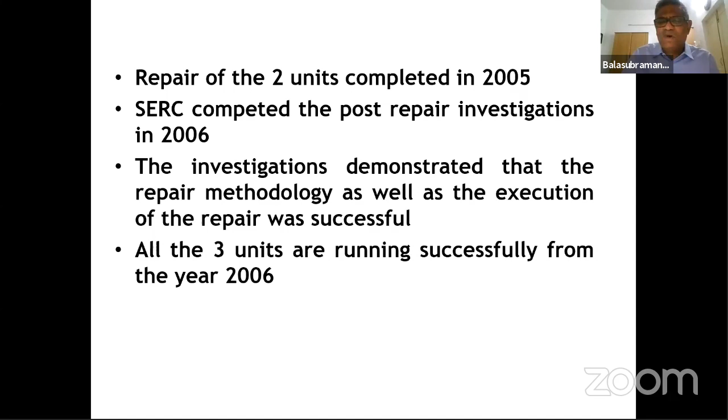Until I heard about 4-5 years back, all 3 units were running successfully. And this is a repaired pedestal. We took the readings and they were coming good. So they are coming very high.

So this is one case study. I put this case study basically because a lot of people think that working in a team is always good. For example, if I had done so much NDT, and I know everything, and I go with that alone, I would not have solved this problem. Unless, because it's a vibrating structure, you get a vibration guy, it's better, you will be able to solve the problem. Otherwise, you will be going round and round, and you won't be able to solve the problem.

So it is not very specific. What I'm trying to tell the faculty is, there is no black and white, bracket kind of thing where you do this one thing to solve the problem. You need to think, and go along with the flow, and see if you don't have core competency in that area. Bring in people, work as a team, and try to solve the problem.

So this worked successfully for us as far as this particular thing is concerned. Because without vibration studies, my UPV would have told me everywhere it is good. I would not even have gone near that pedestal. Because it's a small one, I wouldn't have bothered, because the time is limited.

Costing again makes a huge impact on the testing. Even though I should not be telling this to academic people, costing makes a lot of impact in testing, because you cannot be going on endlessly testing, as it is money. The money people are not willing to give more money because they have their own constraints. So with that limited budget, we need to arrive at something that has to be very sensible.

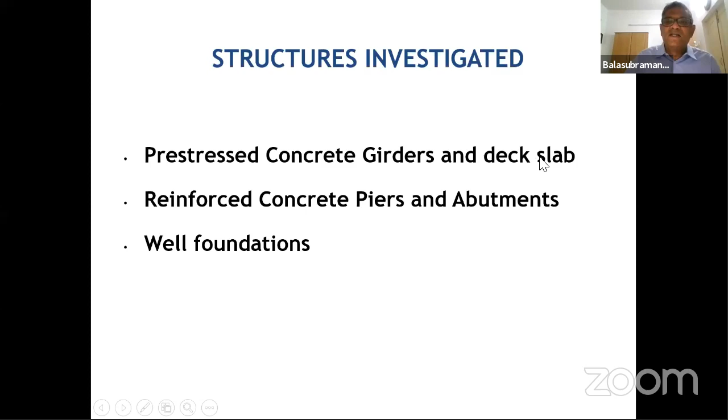So what are the structures that were investigated? Again, this was basically done to give input to the designer, because the designer had to ultimately come up with the load carrying capacity, and there is a lacuna in the load carrying capacity. He has to come up with the rehabilitation methodology. So there were prestressed concrete girders, deck slab, reinforced concrete piers, abutments, and well foundation - these were the structures investigated.

We did all the visual inspection, including the bridge bearings. UPV test was done on the girders, and then the rebound hammer test on the girders, core drilling on the girders, piers, abutments, well foundations. Then durability tests like chloride, pH, all those things were done.

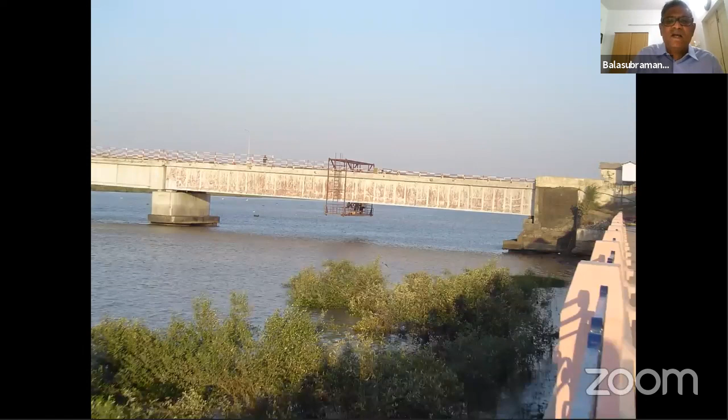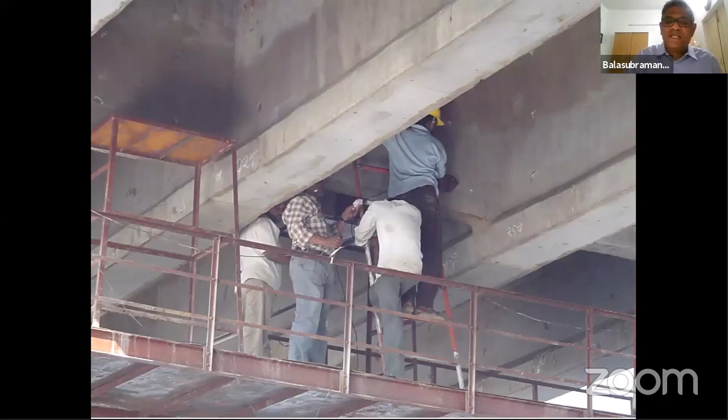And then again, because of the site conditions, they had to fabricate a suspended platform with a roller, so it moves and then can be dismantled and taken to the next span. The girders, diaphragm walls, deck slab - all that were investigated.

Cores were drilled from the foundation. And because it was a pre-stress girder - I'm not an expert on core trepanning, but I can give you a fair idea - we paste a strain gauge on the girder and then take a core drilling machine and drill about 2 to 3 millimeters. When you drill it, the strain is released, and that is measured through the strain gauge in an equipment.

And the E value, you can find out - it is nothing but 5,000 root FCK, because we are taking so many cores, so the FCK value is known, and 5,000 root FCK gives the E value. Strain is measured through this core trepanning method, so you get the stress. It may not be the exact available pre-stress, but it may be around 80-85%, because SERC has got a lot of correction factors through experience gained over many years. So they can get an approximate level of the pre-stress, because the designer has to know the level of pre-stress to come to any conclusion on the load carrying capacity as well as the rehabilitation.

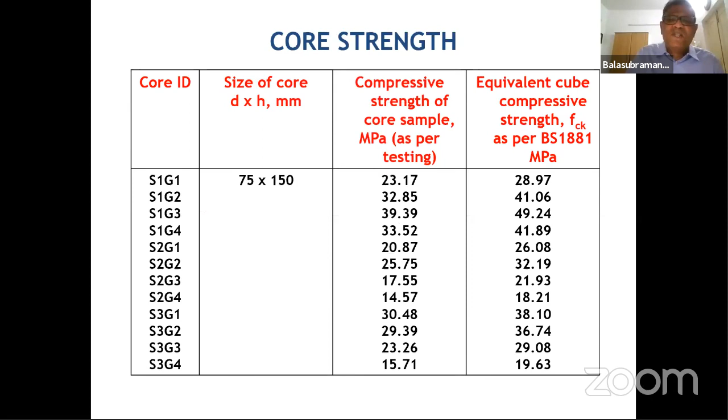So core trepanning method was used to get the loss in pre-stress, and all the values were tabulated and given to the designer. We did a number of tests because the designer said, test, don't bother, test as much as possible. And then a lot of chemical analysis was done, because it was very close to the sea, and we found a lot of corrosion also. Ultimately, the designer came out with external pre-stressing as the rehabilitation methodology.

I think Freyssinet did the work, I think. They put the cables, did the external pre-stressing, and then rehabilitated it.

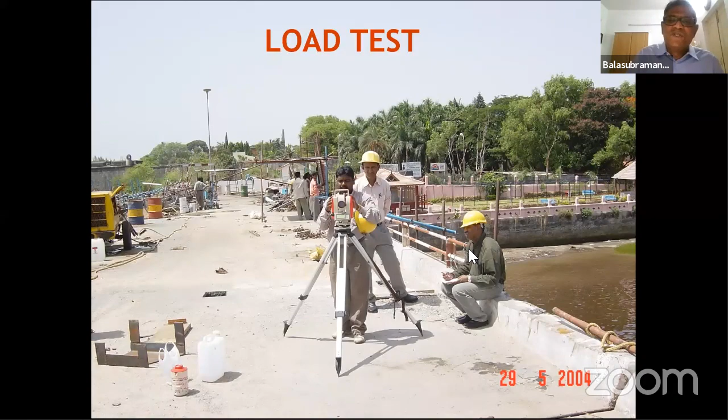And then we did a load test using sandbags, and the total station was used to measure the deflection. And then the bridge was cleared.

And then from the durability point of view, we had given some grouting wherever there was some issue, and then a silane siloxane coating, because we didn't again want to take a chance with this bridge. So silane siloxane coating was given so that it does not allow the chloride to diffuse into the concrete.

And then the bridge rehabilitation was completed, and from the other side they did the new construction, and then it was thrown open. So here is a case where NDT was carried out to give more input to the designer, so that he arrives at the load carrying capacity or the stability, and then based on that, any lacuna, the rehabilitation methodology. So this is another case where NDT can be positively used.

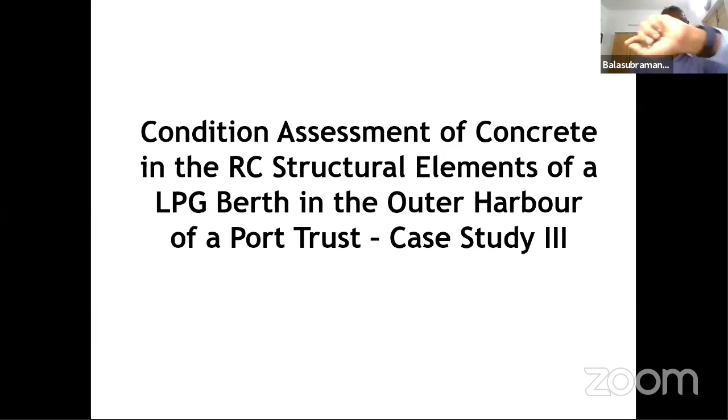And the third case study which I'll be projecting is more on the durability point of view. This is an LPG berth in a port in Tamil Nadu.

We do a lot of marine structures for IIT Madras Ocean Engineering Center. We do a lot of non-destructive testing, and then give the rehabilitation methodology along with the bill of quantity. And Ocean Engineering Center, being very strong in design and other things, use this data, and their scope will be much more, while our scope is very limited towards the condition assessment.

So what we have in a marine structure, you may have a mooring dolphin. A mooring dolphin is a place where you tie the ship. The ship comes into the breasting dolphin, and in a fender, it stays there, and then with the rope, it is tied into the mooring dolphin, and all those structures are made out of reinforced concrete.

So the scope and objective of the work is done. Mooring dolphins, there were 6 numbers, so 75 points in each mooring dolphin. Don't ask me how we got 75 points - it is all worked out based on so many things, costing and other things.

At the same time, being an IIT project, we need to be careful, because when it goes for third-party vetting, we should not be pulled up - with such limited tests, how did you arrive at the methodology? So breasting dolphin, 4 numbers, we had fixed some numbers, and FCK core test - even though it's a durability issue, core test we have to do, because the designer has to be very confident about the FCK values.

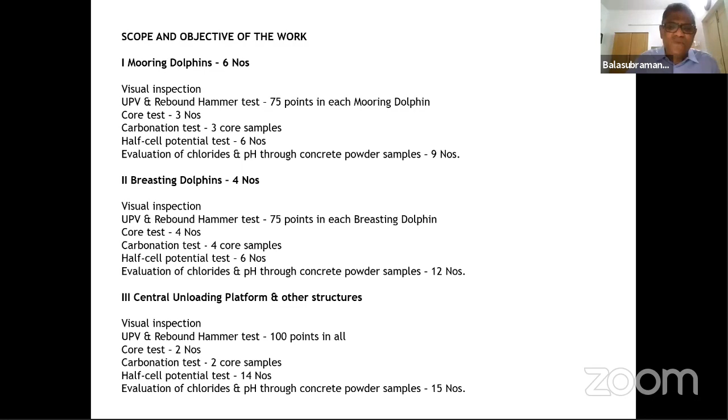So we did core, carbonation, half cell, powder samples, everything. And visual observation, we found in the mooring dolphin - I'll not go through because of lack of time - we found in the mooring dolphin RC piles, steel liners were damaged, spalling of concrete, exposure of the rebars, for example, exposure of rebars, and all the steel liners of the piles of the mooring.

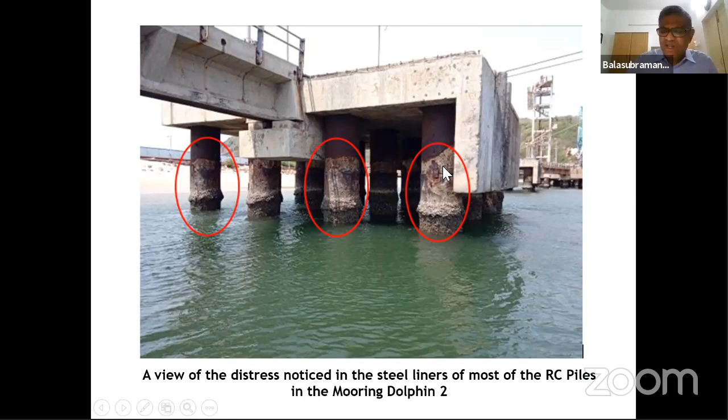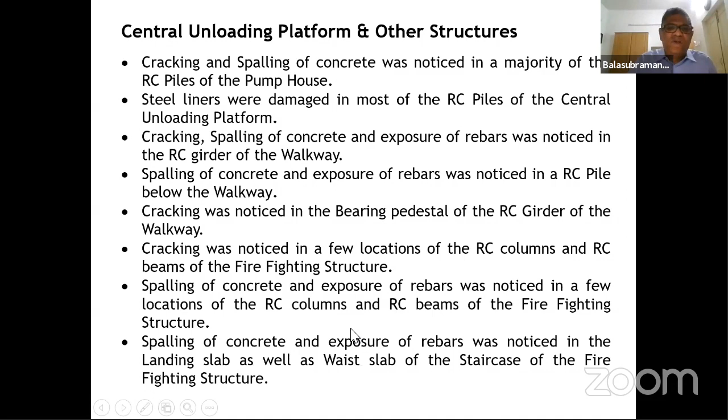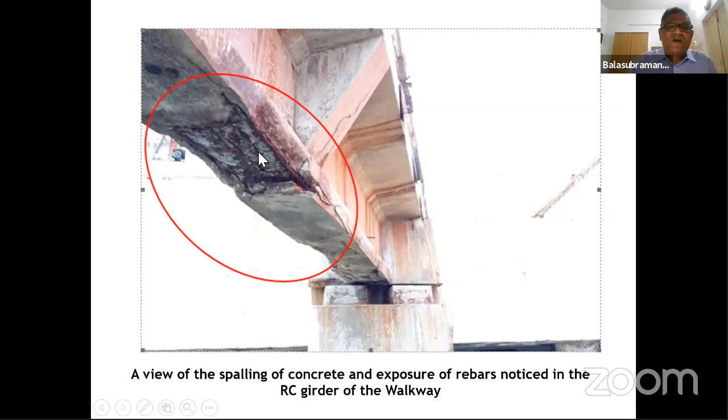So we did NDT testing, rebound hammer, then UPV, and then core testing, and half cell potential testing, powder samples. Summary is that UPV tests showed good results, because UPV tests were generally conducted in good locations. Again, as in the case of a half cell potential test, you can't go and do a UPV test on a bad location, you'll get definitely bad results.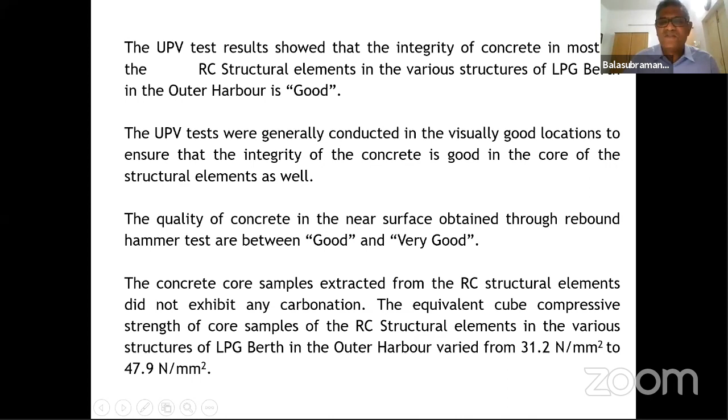So when you're giving a bill of quantity, you have to be very sure. I cannot give a bill of quantity only for the bad location. I need to check the good locations also, because these are all very old structures, in a marine environment where there's a lot of chloride. And the core tests were good, 31 to 47.9, so the designer gets confidence. And half cell potential naturally will be more than minus 350 millivolts, even in good location, because it's chloride infested.

And abnormally high chloride numbers, and pH of the samples were quite okay. So the corrosion of the rebars is mainly due to chlorides.

And the rehabilitation methodology we gave was distress RC piles in the splash zone, underwater microconcrete jacketing, and above the water level microconcrete jacketing, minor distress with polymer modified mortar, top floor to be removed and then redone with a floor hardener. And then we gave a Dekguard, silane siloxane.

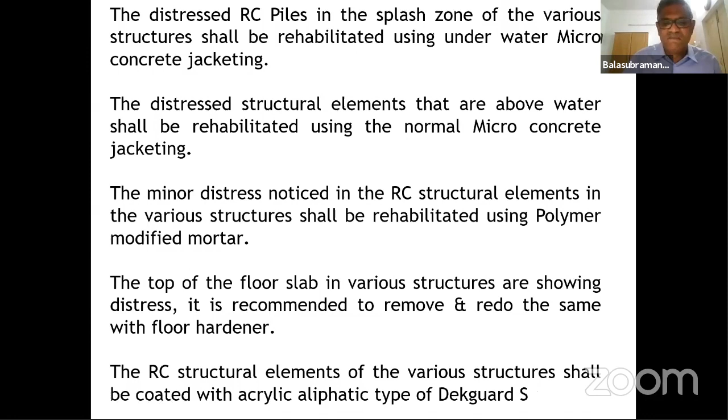Dekguard is a commercial name for Fosroc. So they can use anything, silane siloxane coating, acrylic aliphatic type.

And then the methodology is basically remove the damaged concrete portion. For the chloride levels, chip open the unsound concrete, and then provide shear connectors, because the old concrete has to bond with the new concrete. You have to provide shear connectors.

In some of the ports where they did this shotcreting, we found that the shotcrete was coming out because there was no shear connector bonding the old concrete with the new concrete. So shear connectors have to be given.

Then if the rod has undergone more than 30% loss in diameter, you have to put additional reinforcement, connect it to the shear connector, then give the formwork.

And sometimes we give self-regulating anodes, because it delays the onset of corrosion. That's a different topic by itself, so we'll not go into it.

And then we put microconcrete. Why the cost is going up is microconcrete, because normal concrete itself, if it is about 40mm, 50mm, it's very difficult to place. So we go for microconcrete.

1 cubic meter of regular concrete is 4,500. 1 cubic meter of microconcrete, 50% chips, is approximately 50,000. So that's why all these repair values go up like anything.

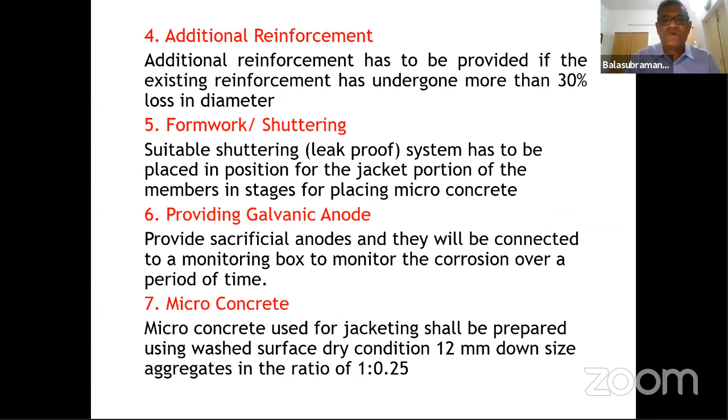So then we need to give a curing compound, because these are all marine structures. Curing may be difficult. Then we give a protective coating.

Because we are giving a self-regulating anode, you can provide a monitoring box, so they can take every year half cell potential, understand whether any onset of corrosion is there. If there is any onset of corrosion, they can go there, remove that self-regulating anode, and put a new anode.

So each anode costs 2,250 rupees. It increases the cost, but then it is good for marine structures.

So we prepare the abstract: what is the quantity, what is the rate, and then surface preparation, anchoring the main reinforcement into the pile, into the deck slab, additional reinforcement, shear connector, sacrificial anode, anti-corrosive coating, epoxy jointing compound, formwork, microconcrete jacketing, underwater microconcrete jacketing, polymer modified mortar, then curing compound.

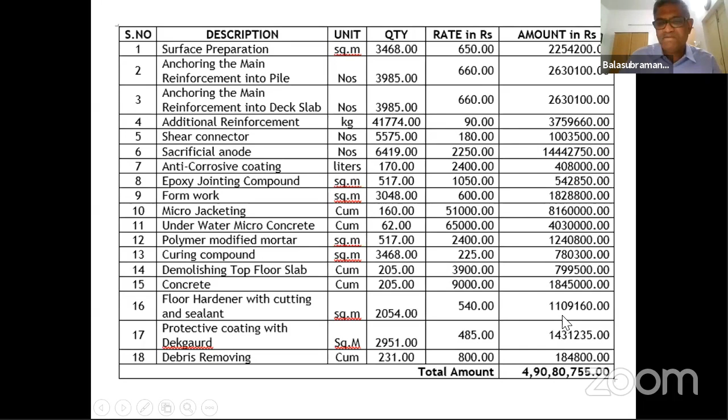Here, because the top of the deck slab had issues: demolishing, then concreting, floor hardener, then protective coating with silane siloxane, debris removal. So the whole thing comes to 4 crores. That's a huge amount of money. That's a lot of money.

Things could have been better if people had moved in much earlier and stopped the corrosion. But then they allow it to spiral out of proportion and then do this. But then that's how things happen.

And this is another bridge, NHAI bridge.

Here, we had a lot of difficulty finalizing the scope because they were not willing to pay that money. I don't want to go into the background. So they didn't want to pay the money.

So we were worried, because ultimately for any NHAI bridge, you do an NDT test and give a methodology or bill of quantity, and it will definitely be vetted by a third-party professor or consultant. So he'll say, how will you, with such a bridge, only 200 points done, come out with a rehabilitation methodology costing 50 lakhs, 60 lakhs.

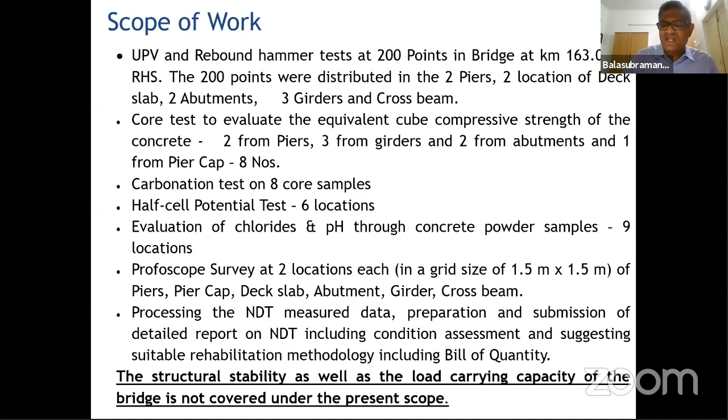So we had difficulty trying to convince the client. Ultimately we need to go through because it is business. So we need to go with the project, and we have to be careful.

So this is the scope of work, and this is a bridge on the Chennai-Bangalore highway. Piers, we didn't have any issue. We did all those tests, whatever. I don't want to repeat it.

We did not recommend any rehabilitation. The piers were perfectly all right. The pier cap, there was some issue.

So we had gone for a dry spray mortar because this bridge is still in operation. Large containers move on top of the bridge, and we cannot stop the traffic. So if you have to give some microconcrete jacketing and all that, then you have to put a core through the deck slab.

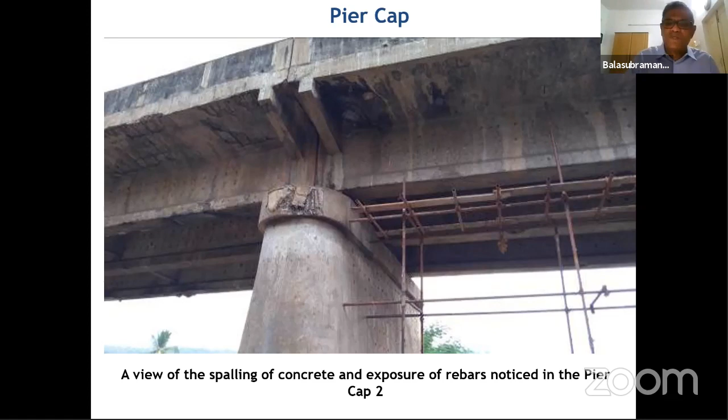Suppose your beam or slab has to be rehabilitated with microconcrete jacketing, then you need to put a core, make a space to pour the concrete. That's not possible everywhere, so we went with dry spray mortar, M40 grade concrete. Here you can see the girder - huge containers are moving on these bridges, and the factor of safety is so high.

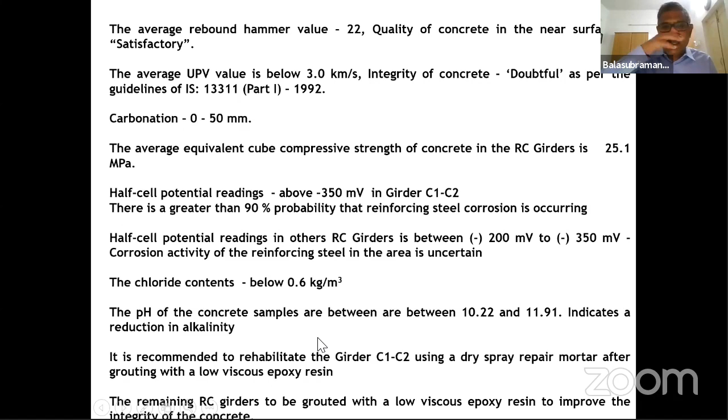Despite so much spalling and exposure of reinforcement, there is no problem to the bridge. In most bridges, you will find the rainwater spouts are invariably clogged or bad. The cantilever portion always gives a problem - here also we had a lot of problems with the cantilever portion of the deck slab where it is overhanging and they put the rainwater spout. It's a very simple thing but maintenance is a problem - simple things lead to issues over a period of time. It keeps accumulating, you will see so much corrosion, rebar corrosion, everything. You have to pay unnecessary money. Instead, if they had maintained the rainwater spout properly, gone there every 3-4 months and rectified it, all these problems would not come.

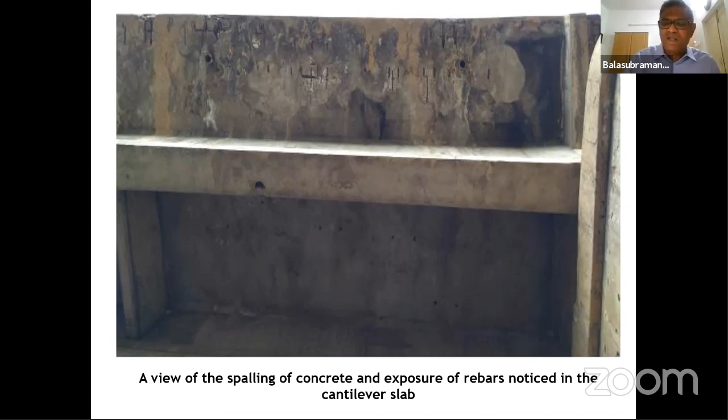For the cantilever deck slab, we recommended using dry spray mortar again because microconcrete jacketing was just not possible, as we had to cut a core through the deck slab where traffic was moving. The abutment was perfectly all right, so no rehabilitation methodology was given there.

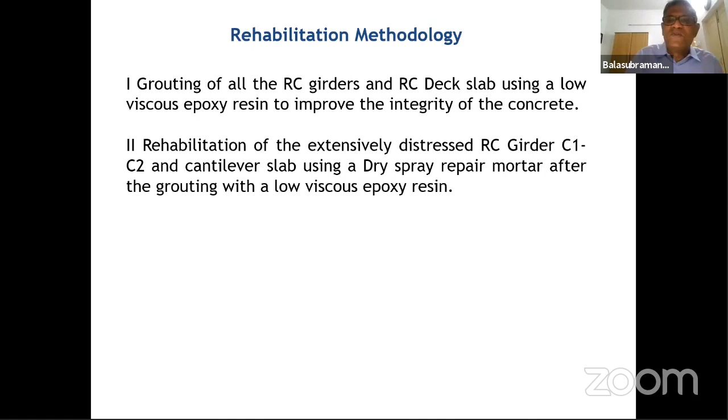So the final rehabilitation methodology was grouting all the RC girders and deck slab using a low viscosity epoxy resin because they were in bad shape. There was only one girder extensively distressed, for which we recommended dry spray mortar. The general methodology: removal of damaged concrete, grouting, anti-corrosive coating, and then applying dry spray mortar or polymer modified mortar in some cases, or microconcrete jacketing in other cases, followed by curing.

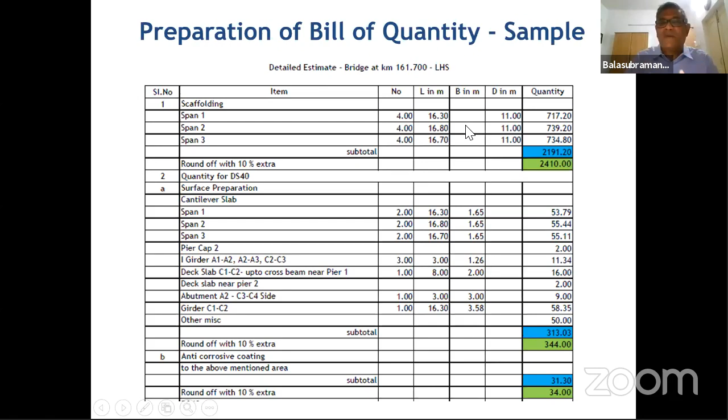Then prepare the bill of quantity. Here you have to be very careful because it goes to the NHAI government body, so you must be very careful when estimating quantity - length, breadth, everything should be there. Then give a detailed specification and the bill of quantity. Here I think it is 51 lakhs as the cost for the rehabilitation. Each number has to be properly justified - this is how it is done.

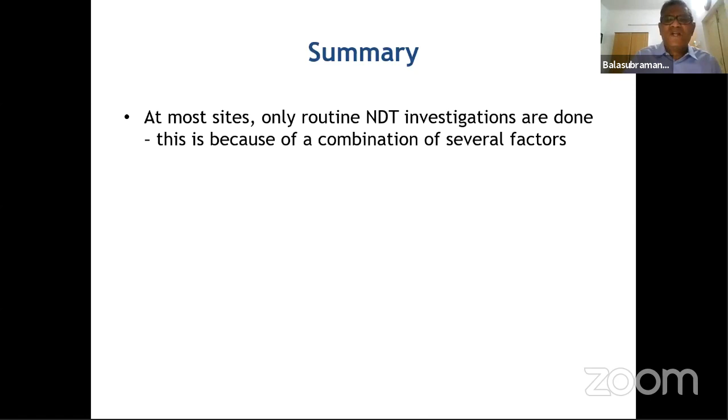In summary, at most sites only routine investigations are done, because of a combination of several factors - limitations of the test and equipment are not well understood. Just because I have some equipment, I think I'm great and I need to use it and justify it - but that's not required for any consultant, because your client is approaching you to solve the problem. How you solve the problem within the limitations of the equipment, you should be very, very frank about - then it solves a lot of problems.

The focus is more on closure of NCs and finding immediate solutions to durability related issues, and this often does not address the real cause or the service life of the structure. Experience has shown it is imperative to use advanced techniques to fully understand the cause of distress. There is a clear need to adopt more reliable investigation methods that interface with other disciplines of engineering and physics. This is very important but may take a little longer time - a lot of people are working on it, but confidence has to be built up so these things can be taken to site. As of now, we are doing rebound hammer, UPV, core, half cell, resistivity, and powder sample testing.

Bottom line is you try to solve the problem of your client and try to do it as ethically as possible. That's the bottom line. You may have a lot of theoretical questions on this. It is very difficult to answer many of them - how do you fix the numbers, how do you fix the number of cores? Nothing is fixed - it's your experience, and it takes a little longer time. But with experience, you can do it. It's not a problem.

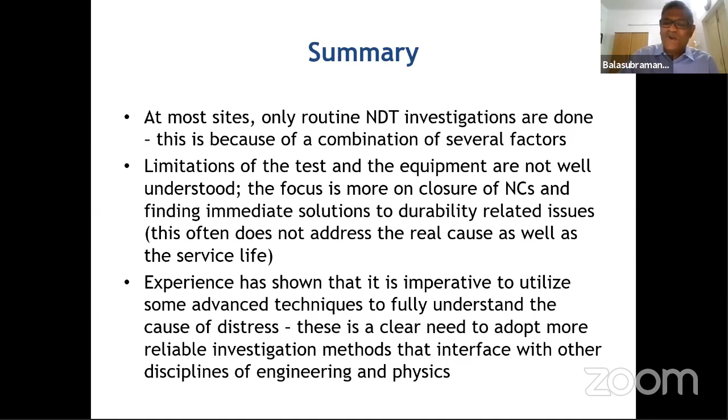Thank you so much, and any questions are there, I will take it. If I know, I'll give the answer, because for me every day is a learning process. And sometimes I'm also forced to do NDT on elements and structures where it is absolutely not required.

For example, a plastic shrinkage crack. I'll tell them, 'Sir, why do you want to do NDT for a plastic shrinkage crack?' 'Sir, they have put an NC, please come and do it, you want to close it.' So I go and hit a rebound hammer, and I don't give the strength at least - I tell them clearly I will not give the strength, I simply say the number and whether the surface is good or bad. 'Sir, that is enough, we'll close the NC.' This is crazy. I don't know why such things happen in the industry, and wrong tests are being done for wrong issues.

These things happen, so please understand the limitations, particularly faculty, when you are teaching or doing any work. Understand the limitation and be careful about it. Because the easier thing is the rebound hammer is 80,000 rupees - take it, hammer it, give the strength. You be very careful, sir, on this.

So any questions are there, I'll take it, sir. Yeah, thank you, sir. Sure. You can stop sharing, sir. Yeah, okay, sorry sir.